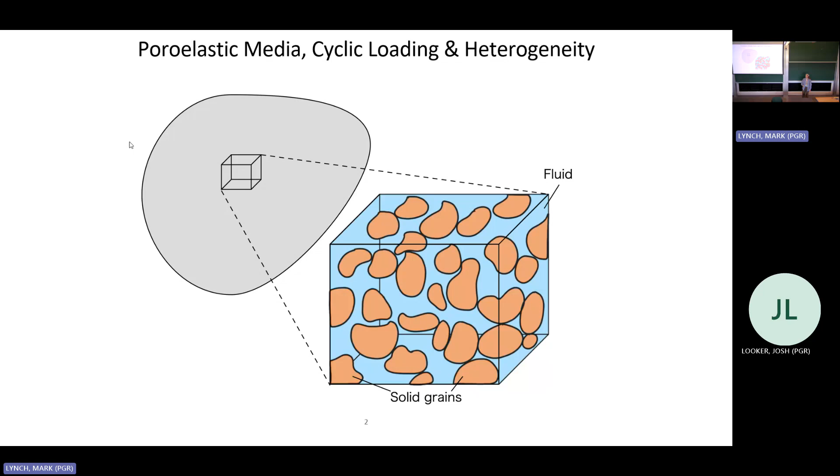So you can kind of think of a sponge, and when you put it in fluid, then it absorbs the fluid that fills the pores. And so sort of the sponge part is the solid skeleton. And there's many poroelastic materials in our world. So the basic example is soil, which is what poroelastic theory was built on by Biot in the 1940s. But also a lot of biological tissues are poroelastic. So your cartilage, ligaments, and tendons can all be modeled as poroelastic, and also the brain.

And a lot of these media undergo cyclic loading. So soil can be subject to cyclic loading from passing traffic, so like cars and trains, but also from earthquakes and waves on the seabed. And then biological tissues like cartilage, ligaments, and tendons experience cyclic loading from the daily activity that we subject them to, so walking, running, writing equations. And the brain also experiences cyclic loading from pulsating loads, which is really important for clearing metabolic waste from the brain.

And a lot of these materials also exhibit material heterogeneity. So for example, you can imagine that a soil might have different layers of different types of soil, so then the soil as a whole is heterogeneous. We also know that cartilage has depth-dependent material properties, or for example in tendons, when tendons get damaged, they change their composition and their structure, which changes sort of the bulk material properties at that damage point. So then you get heterogeneous material properties.

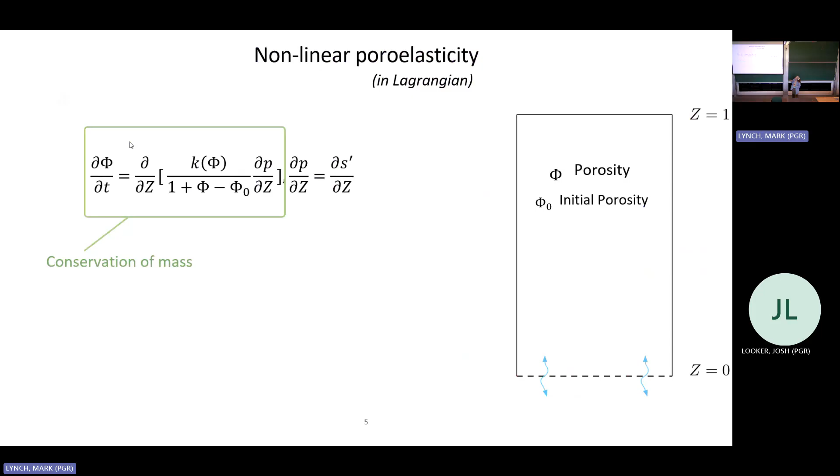So this part of the equation just comes from conservation of mass of the fluid in the solid phase. Then this part is assuming that the fluid follows Darcy's law. So K here is the permeability of the material, which essentially quantifies how easily the fluid flows through the solid. And then P is the fluid pressure.

And then this equation is just mechanical equilibrium, but in terms of the fluid pressure and the effective stress. And the reason we take the effective stress is because in a poroelastic material, the fluid is always exerting stress on the solid, even when the fluid is at rest. And so that stress, that pressure P, cannot contribute to the deformation. So to model the deformation, we're interested in the effective stress rather than the total stress.

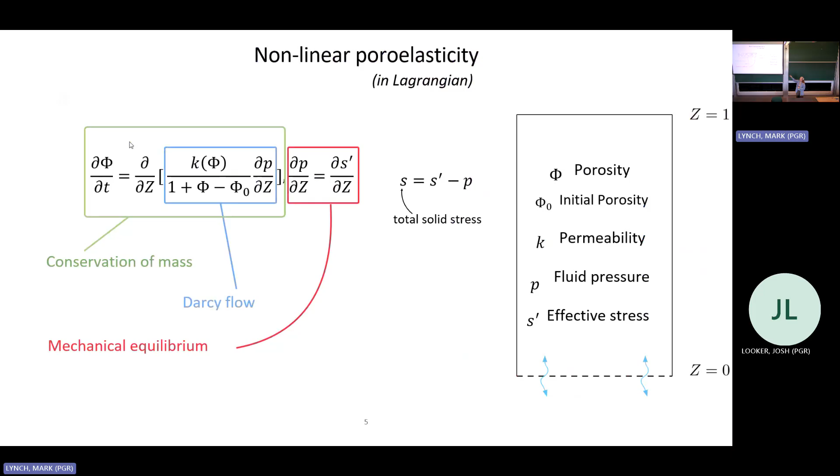So for my model, I've chosen neo-Hookean elasticity for my solid skeleton. And we're assuming that the solid grains are incompressible, but the solid skeleton as a whole is compressible through pore rearrangement. So basically, when you pull on the material, you're going to get fluid that's going to come in and fill the pores. So the volume as a whole increases, but the volume of the actual solid hasn't changed. So basically, you need a compressible elastic law for the solid skeleton, but you've got incompressible solid grains. And that's been a bit of many discussions with my supervisors. And then we're just choosing Kozeny-Carman permeability for our permeability law, and basically that means our permeability increases with porosity.

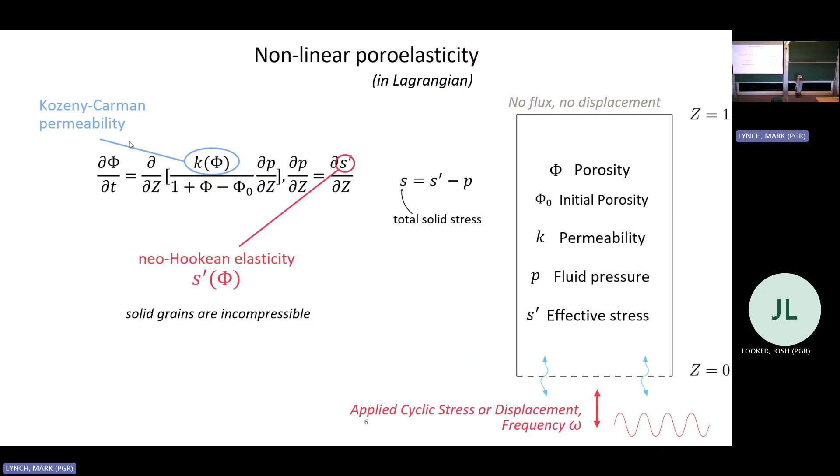Okay, and then at our z=0 boundary, we're going to apply our cyclic stress or our cyclic displacement. We'll look at both with a frequency omega. And we're also assuming free flow at this boundary, so the fluid can come and go freely. And then at the z=1 boundary, we're imposing no flux and no displacement. So that's our system. We still need to introduce some heterogeneity.

So if this is our stress law, which is some function of phi, for us it's neo-Hookean elasticity, but it could be anything that you want, and I'm calling M the stiffness, then I'm going to damage my stiffness by decreasing it locally like this. So I'm going to choose a location for the damage, L, and then I'm going to give it a magnitude of damage to damage it at z=L by magnitude D. And those are parameters that we can play around with. Yeah, and the stiffness is non-dimensionalized.

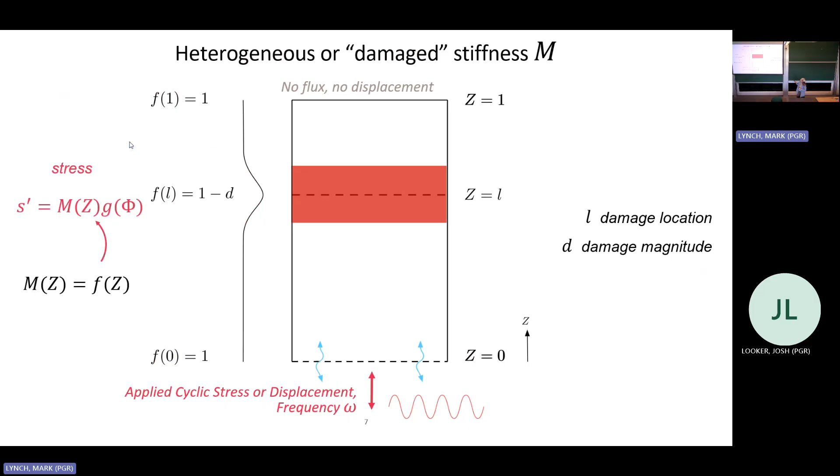Okay, so I'm going to show you some results now, and just a little bit of notation. I'm going to be looking at the strain response, which I'm writing as U sub Z. And in this uniaxial setting, the strain is equal to the normalized porosity, which is the porosity minus the initial porosity. So that's just because we're in a uniaxial deformation. But I'm highlighting this because sometimes I'll be talking about the strain and sometimes I'll be talking about the porosity. They're the same thing. It's just that intuitively, sometimes it's easy to make sense of it thinking about strain, and sometimes it makes more sense thinking about porosity.

I'm also going to look at the relative fluid flow, basically just the flux. I've written the mathematical expression just in case you're curious. That's just the fluid and solid velocity. And then I just wanted to highlight as well, this is the governing equation where I've plugged in the mechanical equilibrium now. And this is a nonlinear advection diffusion equation for porosity or strain. And so the advection term comes in when your stiffness is non-uniform, so you get an additional term. But we're not too worried about that. What's more important here is the system is diffusive, and that's going to sort of help us understand the results.

Okay, so I'm going to show you a few videos of we're applying a stress at a frequency omega = 10, so sort of a moderate frequency. And I'm going to show you some videos of the strain or the porosity, same thing here, against Z, so against the position. So starting with the homogeneous case where we've just got a homogeneous stiffness, so sort of our base case. So you're seeing the strain is increasing at Z=0 where it's being pulled, and then basically it diffuses down into the system. So on average, the strain is greater at Z=0, and then it's smaller at Z=1. But of course, that depends on the point in the cycle. So that's just on average.

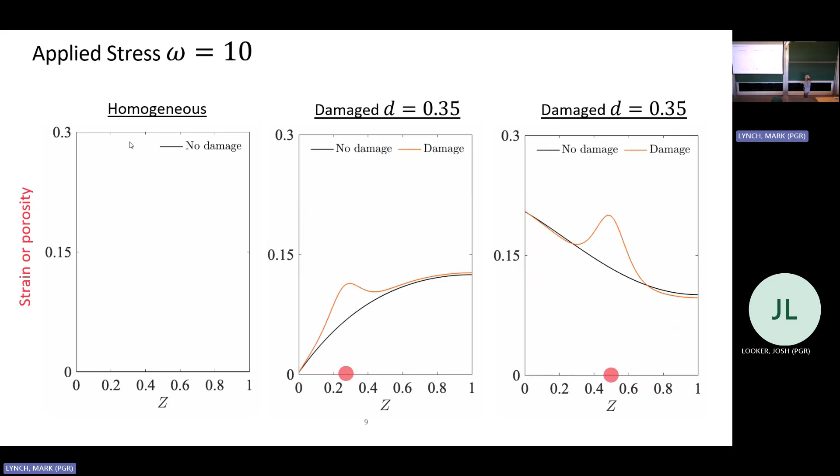Okay. So that's great, but what if we sort of want to characterize this in a little bit more of an efficient manner rather than having to run through a bunch of simulations? So for that, I'm going to define the cumulative strain and the cumulative flux. So by that, I'm going to take the absolute value of the strain and integrate it over all time, and same with the flux.

So for an applied stress, the strain is always positive, so taking the absolute value doesn't actually change anything. But for the flux, it's important because basically, as you pull on the material, you get fluid that comes in, and as you let go, fluid exits. So you're getting positive and negative flux. And once you've settled down to steady behaviour, the positive and the negative flux cancels out. So if I just integrated the flux over time, you wouldn't see any effect. And obviously, that's just not going to capture any of the effect from damage, which is why we take the absolute value.

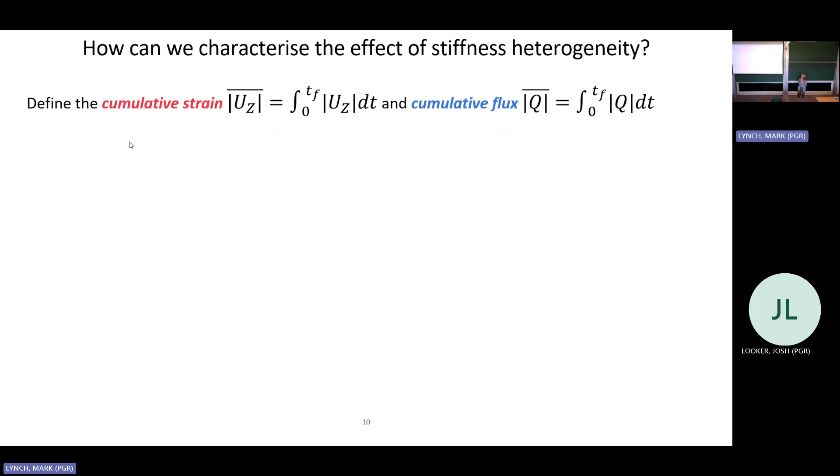And additionally, this also means that this metric is cumulative. So the more cycles we run, the greater the cumulative strain and the flux are going to be. So the quantities are tied to the number of cycles that we choose.

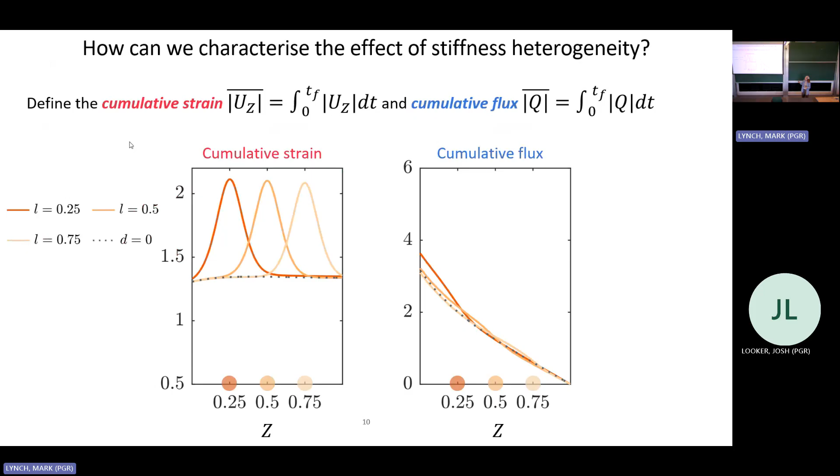And so basically, using this metric, rather than having to look at 3 different videos and compare them to the homogeneous case, we're able to quickly conclude, okay, the strain is affected, the flux not really, and move on.

And we can do the same for an applied displacement. So instead of applying a stress, we apply displacement. And it's quite different to what we saw for the stress, which you might expect. It's a different boundary condition. But basically, without going into too much detail, when you apply a displacement, you're imposing that displacement regardless of the material parameters. So it needs to achieve that anyway. So basically, the strain doesn't really change.

But then when it gets to that damage point, it no longer requires as much stress to achieve that imposed displacement because it's weaker there. So you get a decrease in the stress there. And then the flux depends on the pressure gradients, which is equal to the stress gradients in our poroelastic material. So then the flux gets affected. I won't go into the detail of why it looks exactly like that, but that's basically why it changes.

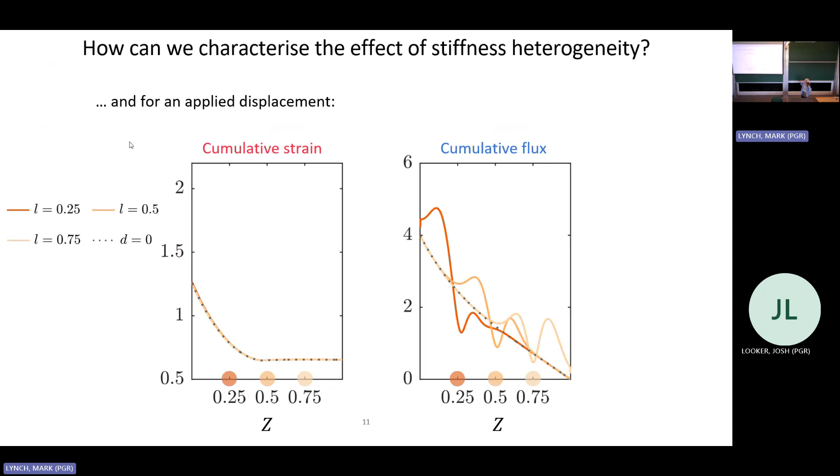Yeah, so we were able to quickly conclude how the response is affected by heterogeneity just by looking at these. But still, we've only looked at a specific set of parameters, and what we'd really like to do is vary loading frequency and damage magnitude and see what happens without having to go through all the simulations individually. So we need to define a metric that captures the response with one number.

And the natural extension to our cumulative strain and flux is to define the net strain and flux, where we're also integrating it over space, so averaging it out. And so I'm going to show you some results for an applied displacement. And I'm also defining delta Q, which is the difference between the damaged and the undamaged net flux. So when delta Q is 0, there's no change between the damaged and undamaged case.

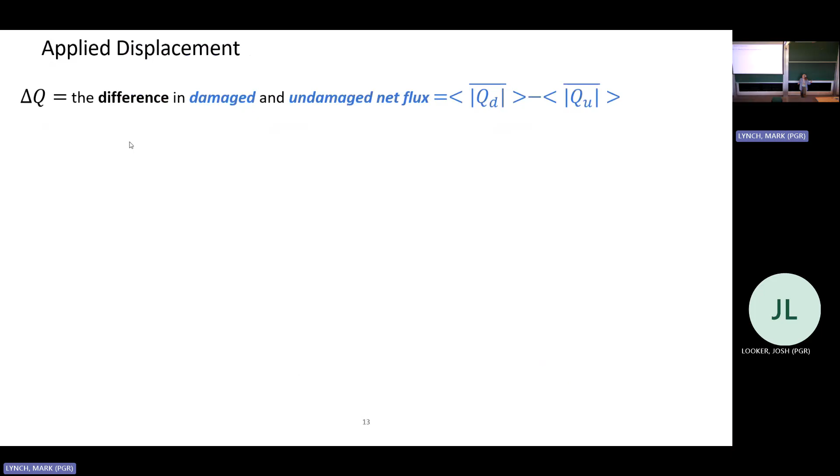When it's positive, then the net flux is increased when you damage the stiffness, and when it's negative, the net flux is decreased. And here's what happens when we vary our damage magnitude and our loading frequency. So first, we see that the net flux is increased, delta Q is positive. And then over here, we see that as you increase the damage magnitude, the net flux increases, the effective damage increases, which is intuitive. So that's good to confirm.

But what we see here is the dependence on the location changes with D, which you might not have been able to capture by just running through a bunch of simulations. So when D is less than 0.5, the net flux increases with the location. But then when it's greater than 0.5, it decreases with the location.

And then over here, we're varying loading frequency. This vanishing porosity is just something that happens when you apply displacement too quickly to a poroelastic material. And as you can see, as you decrease the loading frequency, the effective damage really blows up. And that's basically because the flux linearizes in Z, and you're also getting a longer loading time because we fixed our number of cycles.

But yeah, so we're able to sort of gain information about the system without having to go through all the simulations and capture the trends and the sensitivity to the parameters. But of course, behind these, there's also the underlying spatial and temporal information. And so this can be a really powerful tool if, for example, you have some data about a real physical problem and then you want to sort of infer information about it.

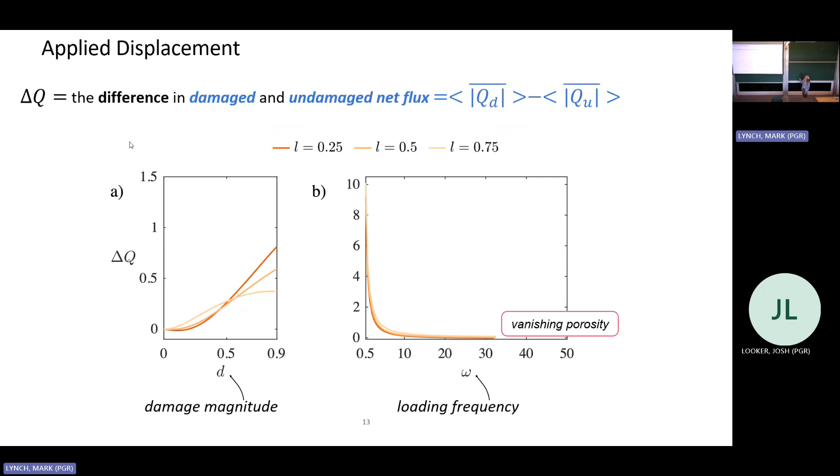Yeah, but of course we do need to be careful when we're interpreting results from a metric because it's obviously completely tied to the definition of your metric. And to highlight that, I want to show you another example where now we're back to applied stress, and instead of decreasing the stiffness here, I'm decreasing the permeability. So a different material parameter, but we're decreasing it in the same way that we were with the stiffness.

And this is the net flux, or the difference in the net flux against omega. First of all, it's negative, which you might expect because you decrease permeability, you decrease the ability of the fluid to sort of get through the solid, so the flux is going to decrease. And you have this non-monotonic dependence on omega, different to what we were seeing for the stiffness.

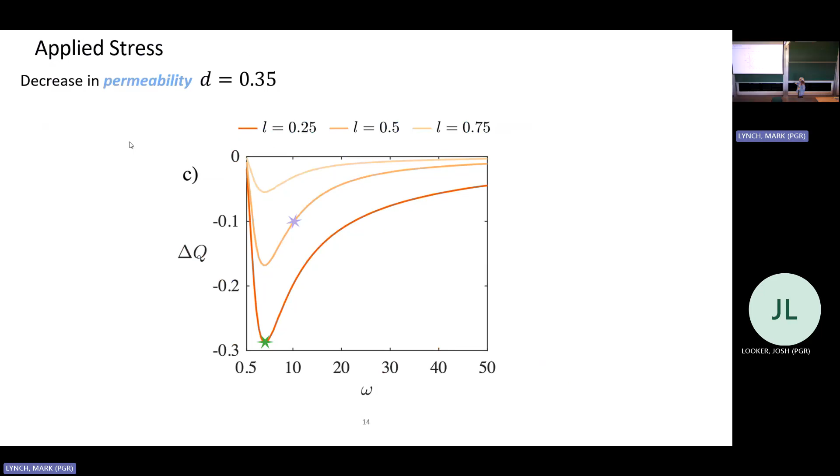And if we look at these two different points, so the point where the damage is maximum, and we look at what the simulation corresponds to for that, this is the flux. It doesn't look like it's changed that much. But then if I look at this point over here where the effective damage looks a lot smaller, and we look at simulations of that, it looks like it's a lot bigger than the other one. And that's just because of the definition of our metric.

So basically we've fixed the number of cycles. So by slowing the loading frequency down, we're increasing the total loading time. And because this is a sort of a cumulative metric, then the more time you're running it over, then it just adds up more and more. So this ends up adding up a lot more than this one. And that's basically what that's capturing.

So the metric and the simulation are giving you different pieces of information, and I guess what matters is what is relevant to the physical system that you're really looking into. So for example, in tendons, what really affects the mechanical function of your tendon? Is it that instantaneous response, or is it a net quantity? And so that's where the biology needs to come in and inform the model. But this is just sort of an example of a metric that you can define, and you can build whatever metric you think is important in your physical system.

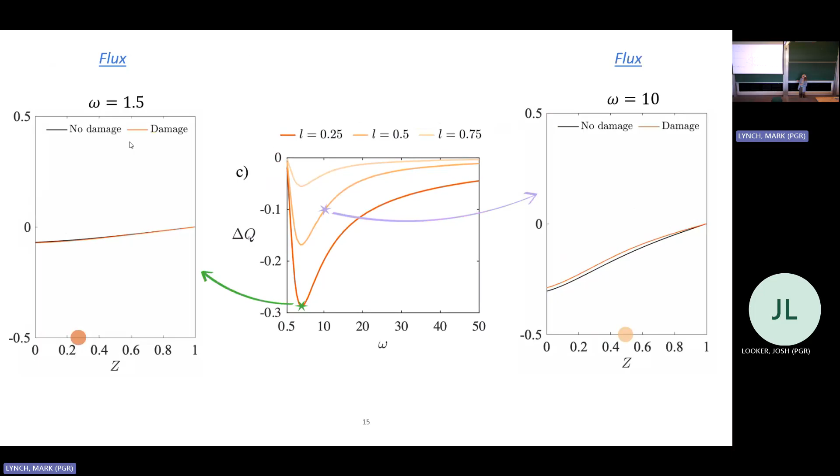So yeah, by defining a metric, we can identify trends in the parameter space and compare across lots of parameters. We can look at different types of damage. So I briefly touched on permeability damage as well. Of course, I just looked at strain and flux, but you could look at anything that you like: pressure, stress. You can also use results from the metrics to compare against real data and then infer information from your model.

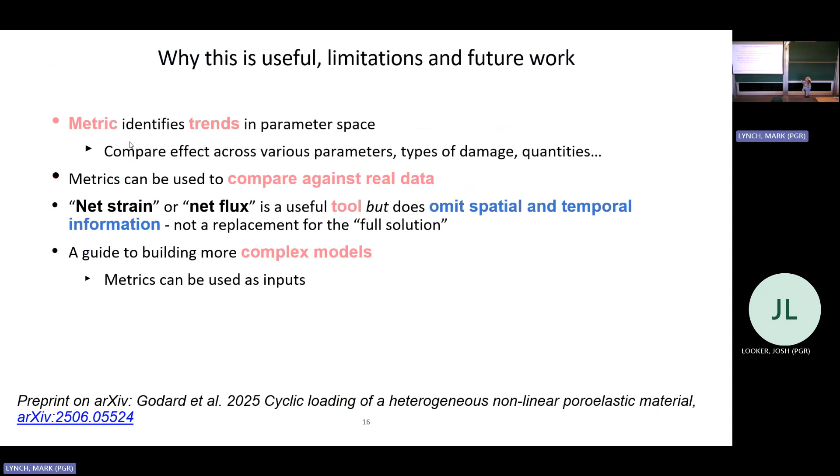And as I said, the net strain and the net flux are useful tools, but they're not a replacement for the full solution, because they're not capturing the full spatial and temporal features of the system. But it can be a useful guide to building more complex models, because it gives us this intuition for how the parameters affect the response.

And then the metrics could also be used as inputs in a larger model. So for example, in tendons, we know that the cells respond to mechanical cues. And although they might not respond directly to net flux or net strain, because that's just a mathematical construct, you can correlate them. And so then you could use that in a larger model for tendons.

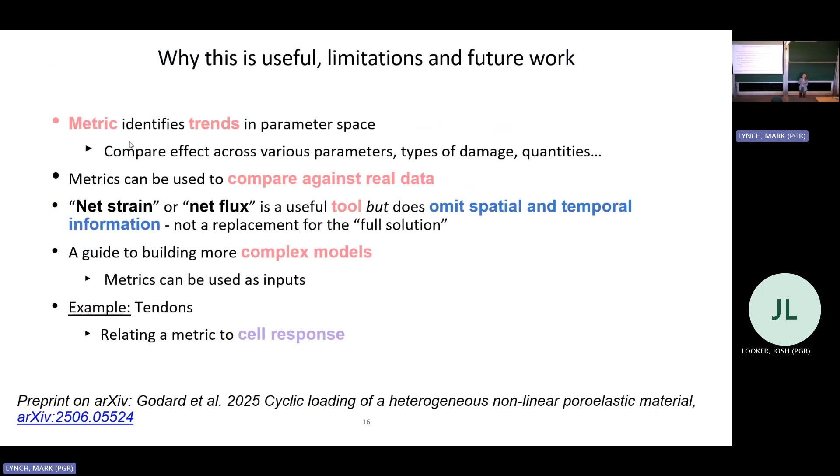Of course, this is limited because we did this in a uniaxial framework. So a natural extension is to go to 2D, 3D. But nevertheless, you can apply this to lots and lots of setups. So you can input any stress law that you want, any permeability law, as long as it doesn't break thermodynamics. You can play with lots of different types of heterogeneity, the initial porosity, the boundary conditions.

And as I've said, I'm motivated by tendons. So at the moment, I'm trying to incorporate a tendon-specific stress law, which is harder to not break thermodynamics than I thought. And trying to then think about modifying the geometry of the system as well to look more like a tendon and play around with the boundary conditions.